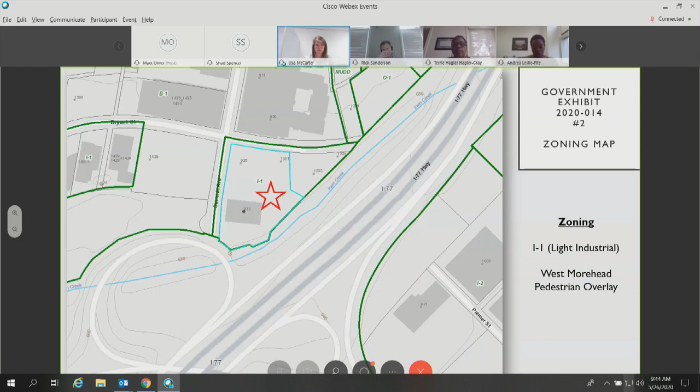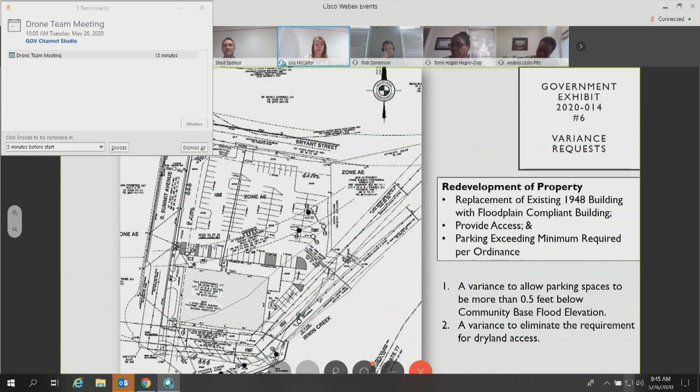The variance requests on Exhibit 6 are a variance to allow parking spaces to be more than half a foot below community base flood elevation, and a variance to eliminate the requirement for dry land access. This is for the redevelopment of the property to replace an existing non-compliant building, demolishing it and rebuilding a new floodplain ordinance compliant building. The parking does exceed the minimum required per ordinance, and this will provide access to the property.

Okay, and that is the end of my presentation if you have any questions. Are there any questions for staff from the board? If there are any questions, please make sure to unmute yourself before you ask. Hearing no questions, is there any reason the board thinks this should be moved to a regular agenda item at the next in-person meeting?

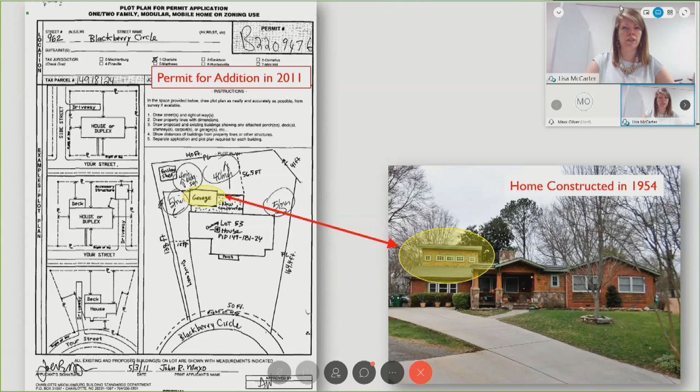The garage was permitted to encroach, but the heated square feet was not permitted to encroach into the rear yard.

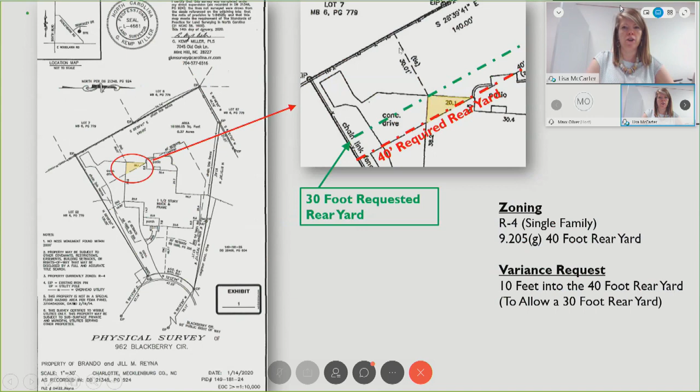I'll go further into that in the next slide. The zoning is R4 single family, which requires a 40-foot rear yard. So the request is to encroach 10 feet into the 40-foot rear yard and allow a 30-foot rear yard.

Unheated encroachments are allowed, so the garage was allowed to encroach 25% of the rear yard and was compliant. Once the heated square feet was added, that's when it was not compliant with the zoning ordinance.

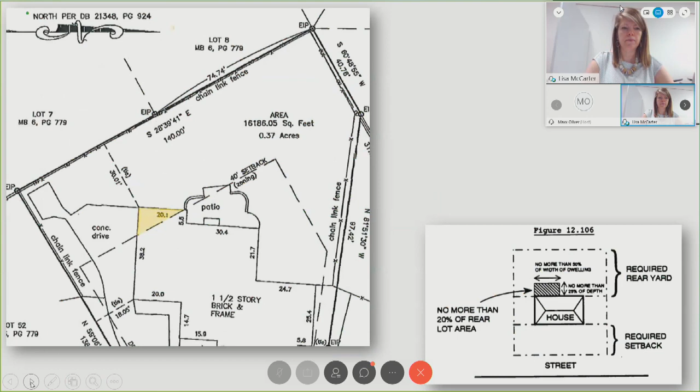The survey that was submitted with the permit application to add the heated square feet over the garage measured the distance of the rear yard from the midline and not from the garage, and it said 56 feet. So that could have been why staff thought it was compliant with the regulations.

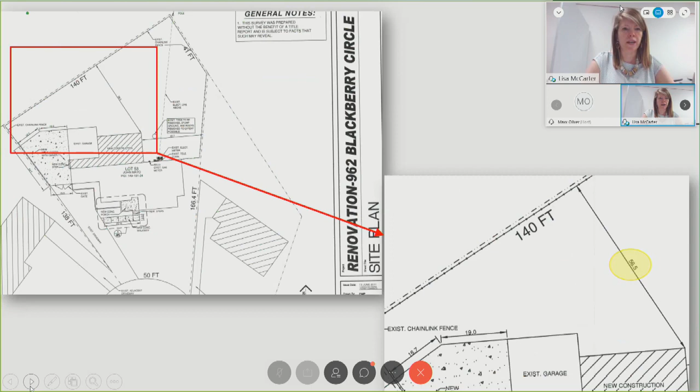And then here are approved plans that were submitted with the application showing the heated square feet over the garage. So that's the end of my presentation. If you have any questions.

Lisa, how was this case brought to staff's attention? The applicant was going to sell the property and they got a survey for the closing.

Are there any questions from the board for staff? Hearing none. Is there any reason the board wishes to move this item to the regular agenda?

Okay, is there a motion? This is Terry Brown. I move to approve the variance. I second the motion. This is Douglas Wilson.

We have a motion to approve the variance by Mr. Brown, a second by Mr. Wilson. We'll take a roll call vote. Mr. Brown? Aye. Mr. Wilson? Aye. Mr. Floyd? Aye. Mrs. Dryden? Aye. Sanderson, yes. So the variance is approved.

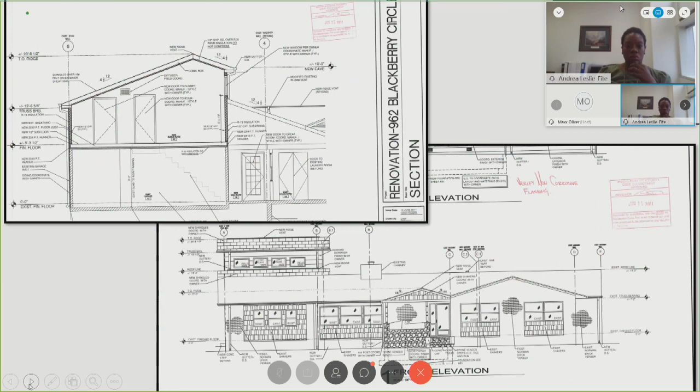Thank you. We have a motion by Mr. Wilson, a second by Mrs. Dryden to approve the findings of fact and conclusions of law in case 2020-014 as written. We'll take a roll call vote.

Mr. Wilson? Aye. Dryden? Aye. Mr. Brown? Aye. Ms. Allen? Aye. Sanderson, yes. Okay, so those are approved.

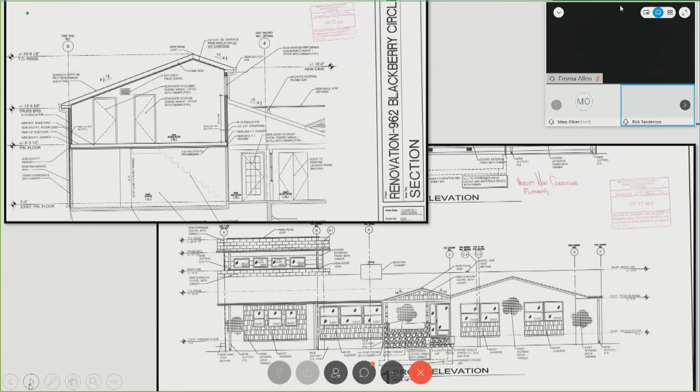So let's go to the third case, 2020-017. The next case is for a 100-foot lake buffer variance. There are two parts to this variance: a 34-foot variance from the 100-foot Mountain Island Lake water quality buffer, and a 2-foot variance from the required 30-foot setback.

And I'll give you a minute to look at your findings. Just let me know when you'd like me to proceed.

Hey, Lisa, please proceed. Exhibit 1 is the vicinity map of the property. The property is located on Mountain Island Lake. Exhibit 2 is a zoning map of the property. The property is zoned R5 single family and is located in the Mountain Island Lake Critical Area 4.

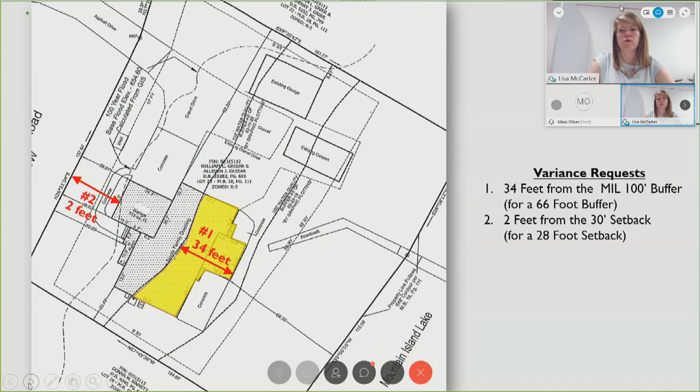Exhibit 7 is a consideration of the request. The property plat specifies that the building setback line is 30 feet from the road right-of-way. So according to the zoning ordinance, the 30 feet would supersede the zoning required setback of 20 feet. So there's a larger setback on this property, and that, along with the watershed buffer, constricts the property.

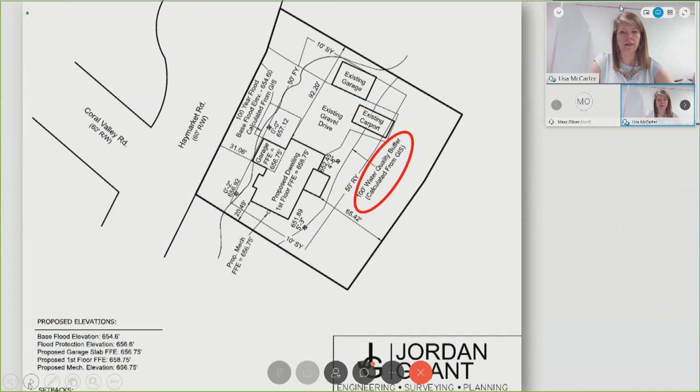Exhibit 8 is another consideration. When the applicant submitted the plans, the water quality buffer was incorrectly shown at the rear of the property line, and it actually goes further up the property and into half of the proposed dwelling area.

Exhibit 9 shows previous variance requests in the same area. There's been 5 other requests from the water quality buffer in the same area.

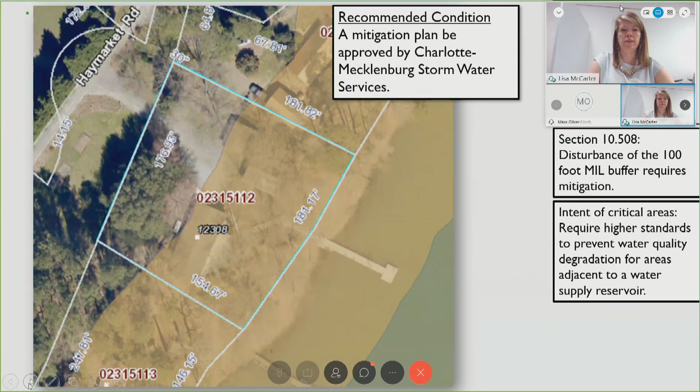Exhibit 10 is a staff recommended condition that a mitigation plan be approved by Charlotte-Mecklenburg Stormwater Services. The applicant has already been working with Ron Eubanks with water quality on this plan, so it is in the process of being approved.

Yes, we didn't see Exhibit 11. Okay, I think there might be a delay.

I had a question. It said that the zoning ordinance requires a 20-foot setback, but the deed shows a 30-foot setback. Is that correct? Yes, the approved plat shows a 30-foot setback, and that supersedes the zoning regulation of 20.

This is a question for Andrea or Teree or Shad. Since the deed has a more stringent setback, does the zoning board have the authority to override it? Yes, it's still a zoning ordinance regulation because a footnote to the setback requirements states that the plat will supersede the zoning regulation, so it still is a variance from the zoning ordinance. That's correct, Mr. Chair. All right, thank you, I was just wanting to get a clarification on that.

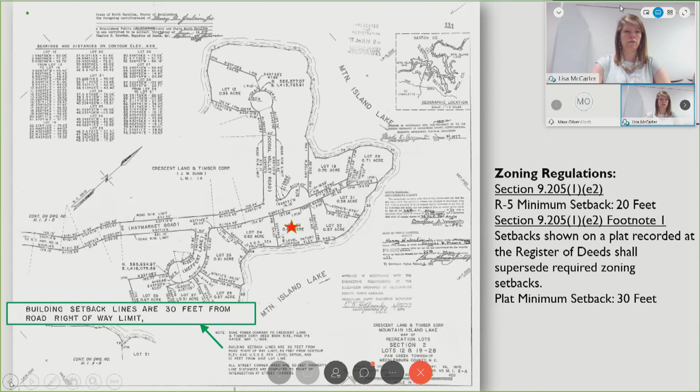Are there any questions for staff from the board? Hearing none, is there any reason that the board wishes to move this case to the regular agenda? Is there a motion?

This is Terry Brown, motion to approve the variance. Thank you, Terry. This is Douglas Wilson, I second the motion. Thank you, Douglas. We have a motion by Mr. Brown, a second by Mr. Wilson to approve the variance.

We'll take a roll call vote. Mr. Brown? Yes. Mr. Wilson? Yes. Mr. Floyd? Yes. Mrs. Dryden? I just want to be clear, we're approving both of the requests for the variance or just one of them? Both requests for the variance: the 34-foot variance from the 100-foot Mountain Island Lake water quality buffer, and the 2-foot variance from the required 30-foot setback. Okay, I vote yes. And Sanderson votes yes, so it's approved.

Let's look at the findings of fact and conclusions of law.

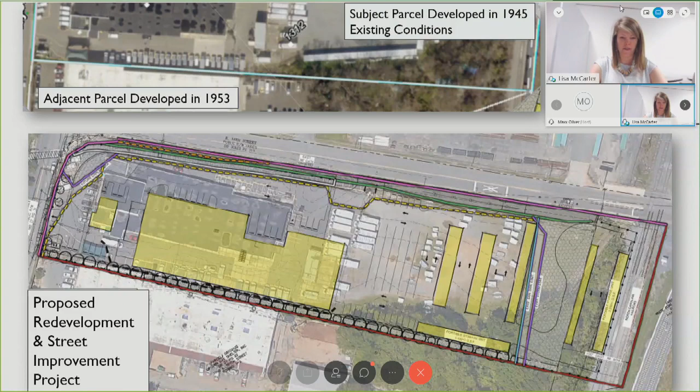The applicant is requesting a variance of 11 feet from the required 21-foot buffer for a 10-foot buffer. The buffer required is that the developing use, once they redevelop the U-Haul facility, is other business uses, and the abutting use of the men's shelter is medium intensity institutional. So a Class C buffer is required. The U-Haul facility's square acreage is 4.5, so it would require a 28-foot buffer, and then the buffer can be reduced 25% with the use of a fence, which gets them down to a 21-foot buffer requirement. The existing buffer is 0 feet, so they're asking for the 10-foot buffer.

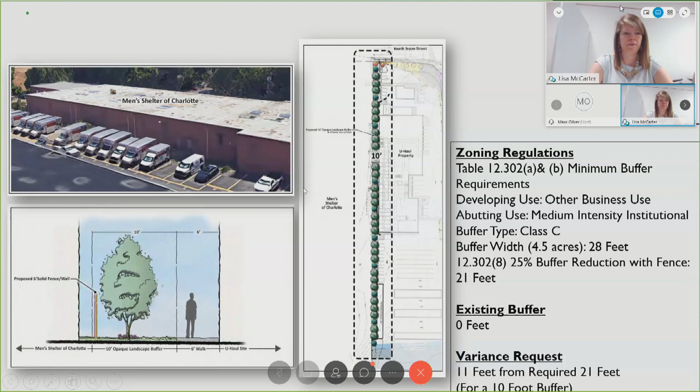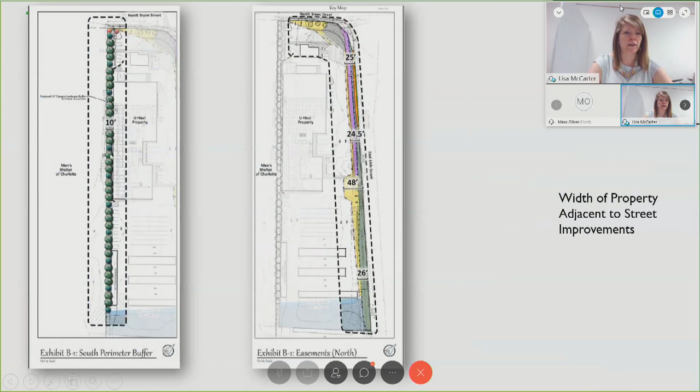Exhibit 7 is a consideration that shows the width of the property adjacent to the street improvements. You can see that it's about 24 and 25 feet wide, going to about 26 feet. So the area that will be used for the street improvement is greater than the variance they're requesting of 11 feet from the 21-foot buffer.

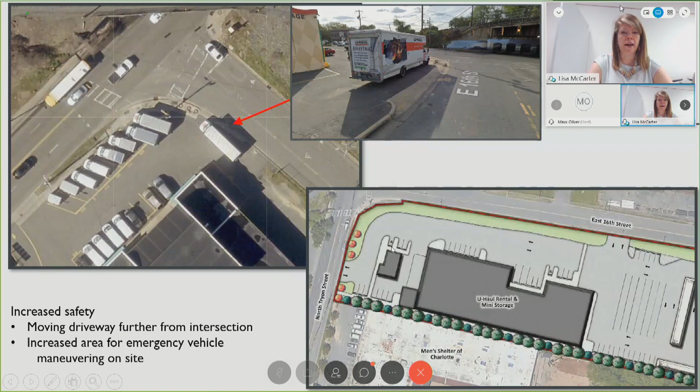Exhibit 8 is a consideration that the new design of the property along with the street improvements will move the driveway further from the intersection. Right now there's a driveway right at the intersection of Tryon and 16th, and it will allow increased area for emergency vehicle maneuvering on the site.

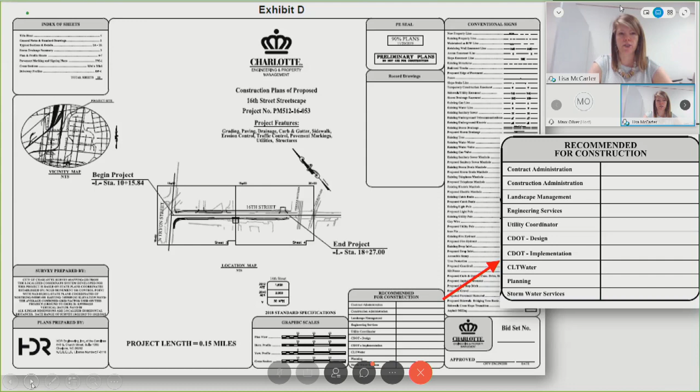Are there any questions for staff? Hearing none, is there any reason the board wishes to move this to the regular agenda?

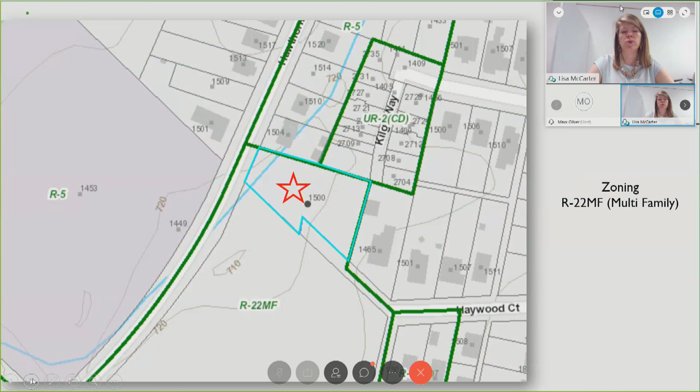Yes, you can go ahead and proceed. Exhibit 1 is a vicinity map of the subject property. Exhibit 2 is a zoning map of the property. The property is zoned R22MF, which is a multifamily zoning. Exhibit 3 is an aerial map of the property, and Exhibit 4 is a close-up aerial map of the property.

Exhibit 5 shows the background of the property. The property is located on Hawthorne Lane, and I've highlighted in yellow the sewer and storm drainage easements on the property, as well as the property line shown in green. You can see that the property has a substantial amount of area that's taken up by the sewer and storm drain easements.

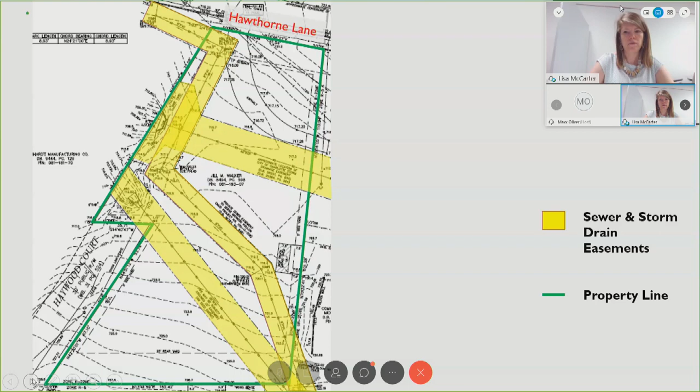Exhibit 6 is more of the background of the property. The applicant proposes to build a duplex on the property, and the proposed right-of-way from the street is 30 feet. The existing right-of-way is 25 feet from the center line, so that takes away an additional 5 feet that they can build. And on slide 6, you can see the easement running right back along the rear of where they'd like to build.

So it constrains the area and footprint for building. Hawthorne Lane is a minor arterial, so that's why we have that transitional setback. The 20-foot setback for R22MF is going to be measured from that transitional setback, 30 feet from the right-of-way. So this area in yellow and green is that area that is constrained.

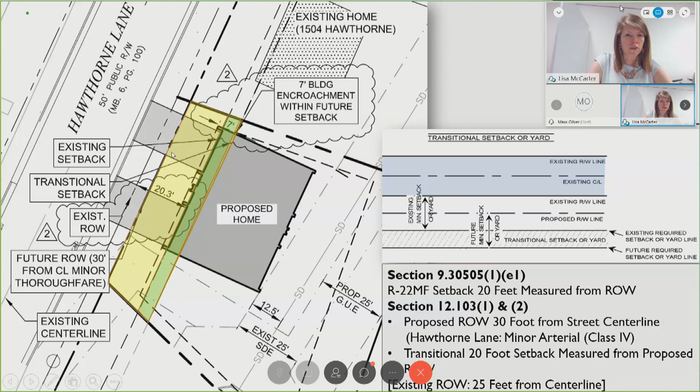Exhibit 7 shows the variance request. The applicant requests a variance of 7 feet from the required transitional setback. This does encroach 2 feet into the required setback, which is measured from that existing right-of-way of 25 feet. This red line shows where the front of the home would go, and you can see the little wings sticking out that are about 2 feet in front of the home.

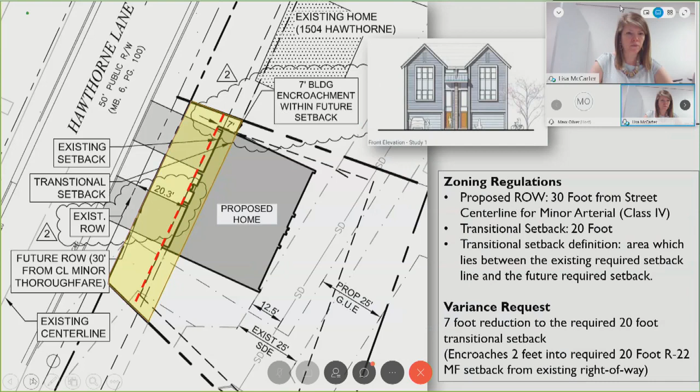Exhibit 8 is a consideration that the proposed home does meet the required minimum garage setback of 20 feet. This keeps cars from the sidewalk and right-of-way area, maintaining that distance for safety.

Exhibit 9 is another consideration. Charlotte Department of Transportation supports decreasing the transitional setback and maintaining the proposed right-of-way of 30 feet from the center line. The reason for that is Hawthorne is within the high injury network and is a thoroughfare, so this will accommodate future roadway improvements and allow for safety.

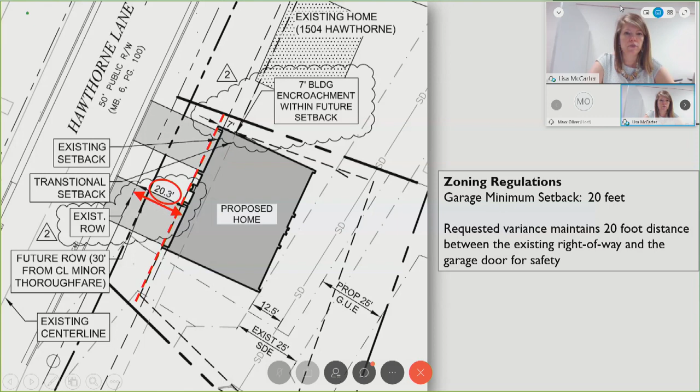Are there any other questions for staff? Does the board see any reason to move this to the regular agenda at a future meeting? Hearing none, is there a motion to approve?

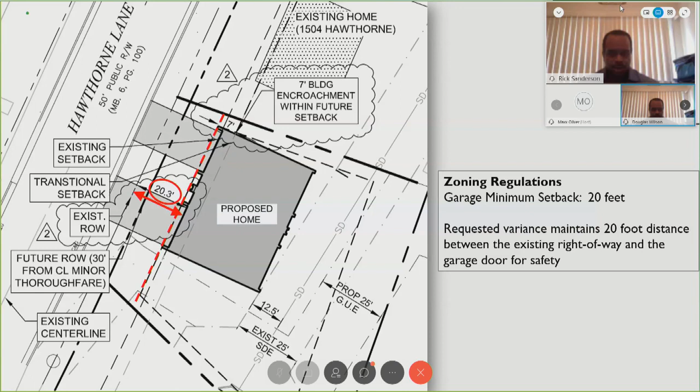Yes, this is Douglas Wilson. Can I make a motion to approve the variance? This is Terry Brown. I second that. We have a motion by Mr. Wilson to approve the variance, seconded by Mr. Brown. We'll take a roll call vote.

Mr. Wilson? Aye. Mr. Brown? Yes. Mr. Floyd? Yes. Mrs. Dryden, do you have a vote? Yes. Sanderson, yes. The variance is approved.

Let's look at the findings of fact and conclusions of law. I didn't see anything.

Is there a motion? This is Douglas Wilson. I make a motion to approve the findings of fact. Is there a second? This is John Floyd. I second.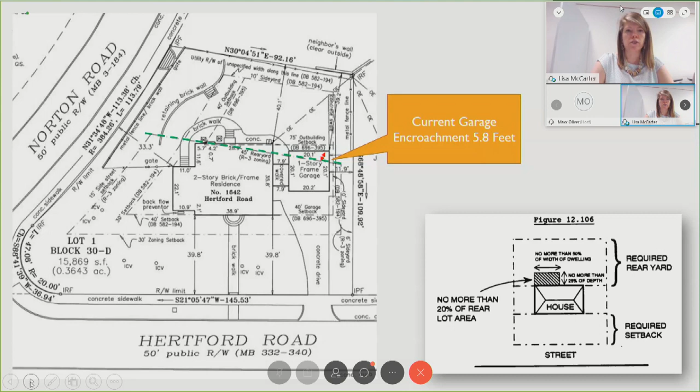Once the second story is added and that space is expanded, that encroachment is no longer allowed, so it doesn't comply with ordinance regulations. The applicant is requesting a variance of 9 feet from the 45-foot rear yard for a 36-foot rear yard to accommodate the addition and enlargement.

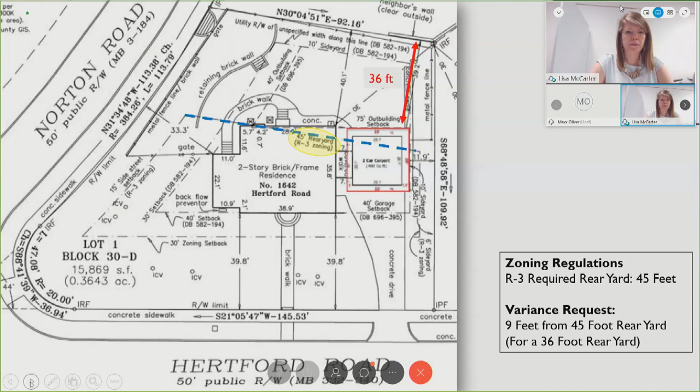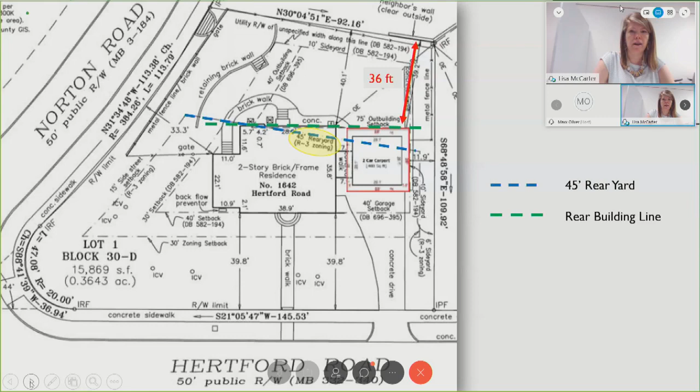Exhibit 9 shows the consideration that the proposed addition follows the existing rear building line of the home. You can also see that the rear property line is slanted and the depth becomes narrower toward the side where they'd like to add the second story in addition to the garage.

Exhibit 10 is a consideration of the irregular lot shape and the angled rear lot line. You can see that the lot is very odd - there's a significant portion that comes out at the corner, and there's not a lot of rear yard space.

Exhibit 11 is another consideration. The subject property depth measures from 113 to 110 feet, while other properties in the area average a depth of about 163 feet. So the applicant's property has less depth to work with.

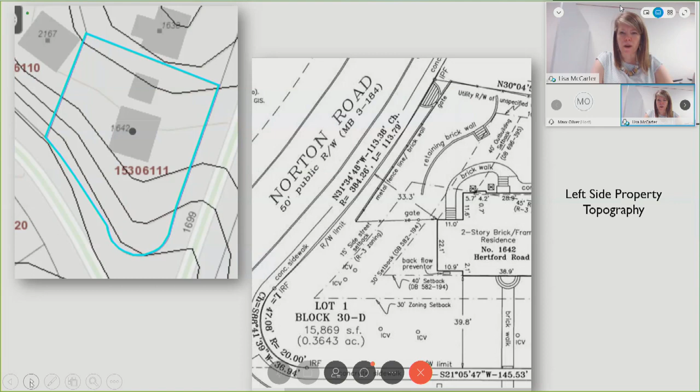Exhibit 12 is a consideration of the topography on the left of the property that would prevent adding on the northern side. There's a retaining wall in the rear yard on the left side.

Exhibit 13 is a photo of the subject property, and that is the end of my presentation if you have any questions.

Lisa, so this is a legal non-conforming currently? Currently, it's compliant because that garage is an unheated extension of the principal structure that's allowed to encroach. But it appeared that the corner of the building or the house is within that setback as well, correct? Oh, correct. Yes, on the main part of the structure there is an existing non-conforming situation.

Building line at the house, correct? Can you repeat the question? I said that the proposed garage and second floor addition rear line is going to line up with the rear line of the existing house. Correct. So the proposed setback would be the rear of the structure. Yes. Okay.

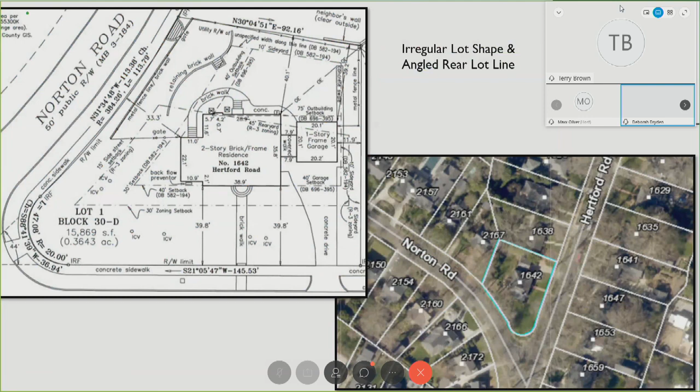This is Terry Brown. I move to approve the variance. This is Deborah Dryden. I second that motion. Mr. Brown to approve, Dryden seconds.

Have a roll call vote. Mr. Brown? Brown, yes. Dryden? Yes. Mr. Floyd? Yes. Mr. Wilson? Yes. Anderson, yes. Approved with the findings of fact.

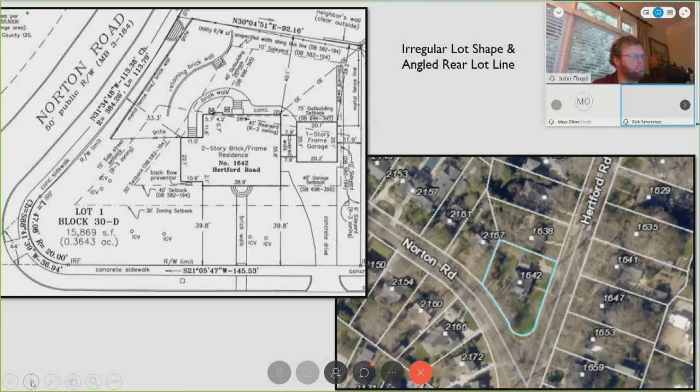I didn't see anything.

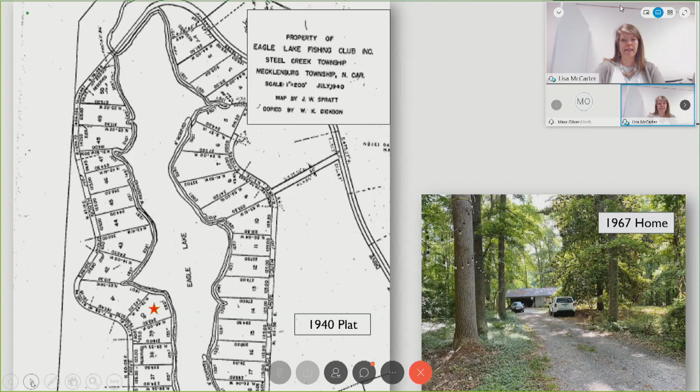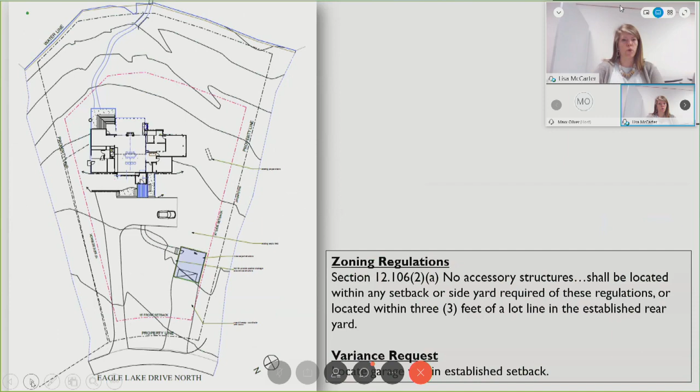The applicant is requesting a variance to locate a garage within the established setback. According to the zoning ordinance, no accessory structure shall be located within any setback. So it can't be allowed in the established or required setback on the property.

Consideration on slide number 7 is that there's a swim buffer from the stream, and it's 50 feet on the back side of the property, and that restricts building from that area of the property.

Exhibit 8 shows considerations that there is a propane tank to the side of the property. On the right side where the propane tank is located is where there's a little more area that construction might be feasible, but then there's that propane tank. And there's also a septic field at the end of the driveway, so they couldn't build in that septic tank area further back. So where they're showing the garage is the furthest back that they can place it on the property.

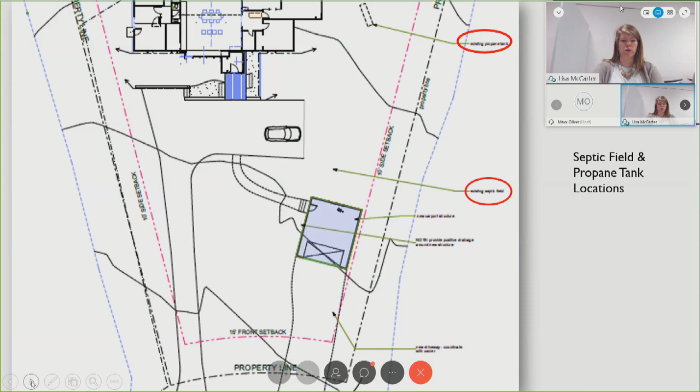Consideration 9 is a recommended condition that the proposed garage should be located outside the required 30-foot setback. The reason for this condition is that the applicant's plan shows a 15-foot front setback, but the setback is actually 30 feet required by the zoning ordinance, and the applicant has agreed to the proposed condition.

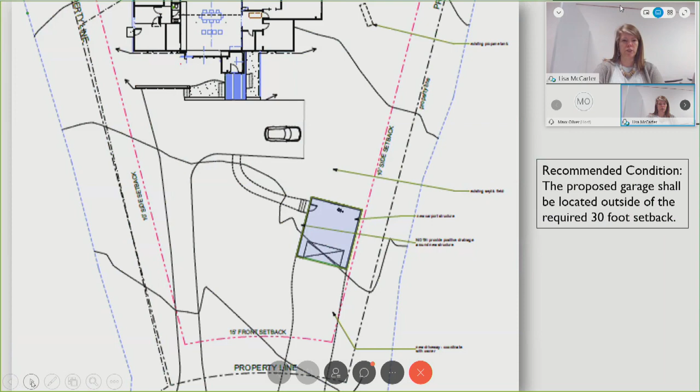Thank you, Lisa. Are there any questions for staff? Hearing none, is there a reason the board wishes to move this to the regular agenda? Is there a motion?

This is Douglas Wilson. I move to approve the variance. This is Deborah Dryden. I second that motion. We have a motion by Mr. Wilson to approve the variance and a second by Mrs. Dryden. We'll take a roll call vote. Mr. Wilson, yes. Mrs. Dryden, yes. Mr. Brown, yes. Mr. Floyd, yes. Sanderson, yes.